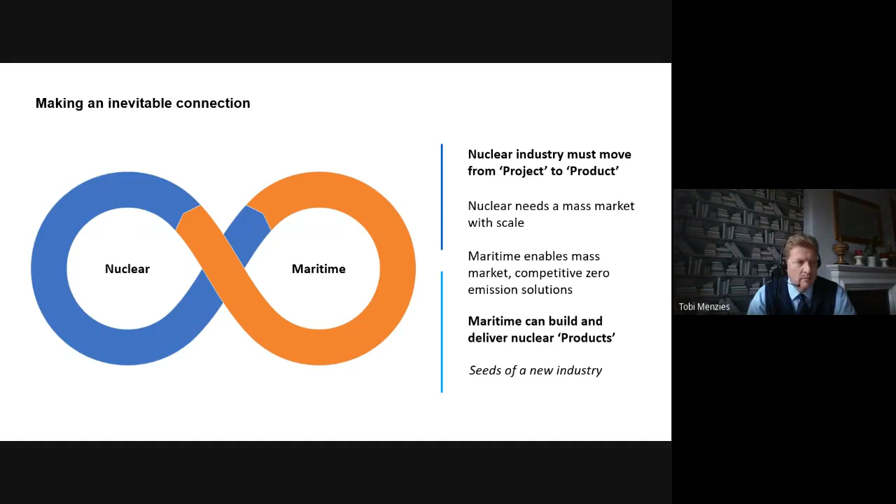Now, knowledge about the nuclear industry currently amongst commercial maritime is limited to fairly small specific pockets. And broadly speaking, there's little knowledge of the maritime sector amongst the wider nuclear industry. So Core Power was formed in 2018 to try and bridge that gap and to create an organization that can pave the way for deployment of advanced reactor technologies, both as offshore installations and on commercial ships.

So more specifically, these are some of the areas that we're involved in. However, I think the most important are arguably the first one and the third one, in the sense that we co-fund and co-develop advanced reactors that can be made appropriate for use at sea. And we're at the forefront of the efforts to update the regulatory landscape so that that technology can be deployed when it's ready.

The other mission statements are, of course, important too, and I'd probably highlight the last one, which is, I guess, our execution risk, if you like: eventually developing a mass manufacturing capability for some of these nuclear technologies is a big piece of our work in front of us.

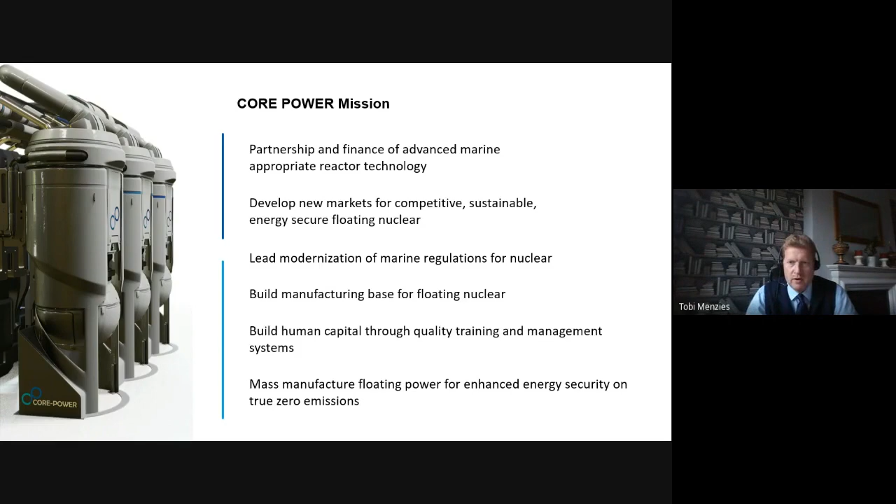But shipping as a global industry has two main challenges in front of it. It has to produce less waste and emissions in part to stop the warming of the planet and to slow that change in our climate caused by the release of waste and exhaust gases into the environment. But it also must remain economically competitive.

Shipping is one of the world's most fiercely competitive markets. It's not a team sport. It serves more than 80% of global trade. So it's really essential that it can continue to do that in an economic manner. And that means maintaining the conditions for a competitive market that both innovates and creates. And it's really the energy use and the energy efficiency that sit at the very center of that.

So the global push for a just energy transition and an environmentally sustainable ocean transportation sector will, at the end of the day, come down to the matters of energy density and energy efficiency. Simply put, the more fuel we use, the more waste we produce, and conversely, the less fuel we use, the less waste we produce. That's why energy content really matters.

So the current low sulfur intermediate fuel oil, IFO 380, contains on average 41 megajoules per kilogram. It equates to just over 11 megawatt hours per ton of fuel consumed. And the industry's focus is on moving to synthetic fuels made from green hydrogen, and they contain less than half the energy of current bunker fuels. So green methanol contains just 20 megajoules per kilogram, and green ammonia slightly less than that.

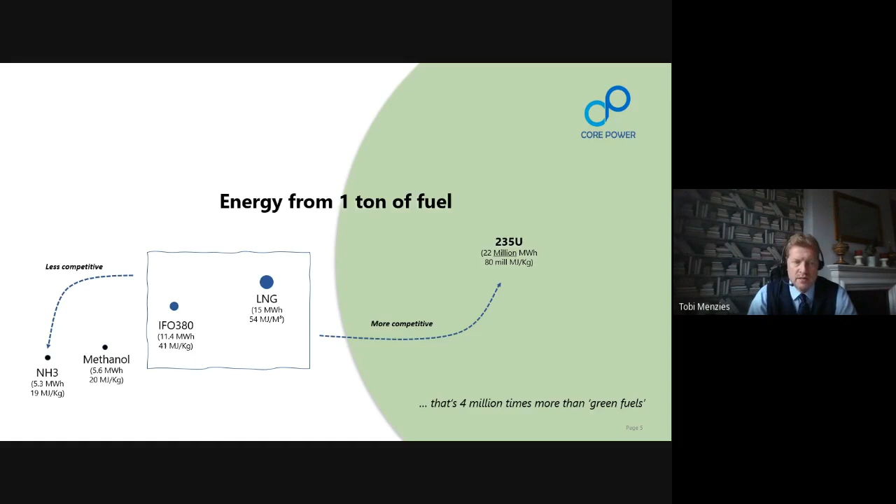So the physics tells us that the quantity of fuel and the fuel efficiency then guide the amount of waste that we produce. So unused carbon in the vessel exhausts from the burning of the bunker fuel mixes with oxygen in the air and creates approximately 3.2 tons of CO2 per ton of bunkers consumed. So that's how the shipping industry contributes 2.5% of the 50 billion tons of global CO2 emissions every year.

Now, using LNG and green methanol would somewhat improve on this. In green ammonia, it's the pilot fuel that's required to start that would actually be the only source of CO2. But with nuclear fuel, since we use so infinitely little of it, we only produce very, very negligible quantities of waste. And that waste, that final product, whilst it is toxic and harmful if ingested, it's obviously never released out into the environment like we do currently with exhaust gases from ships. So if it's not delivered to the environment and it's not ingested, it's logically not harmful.

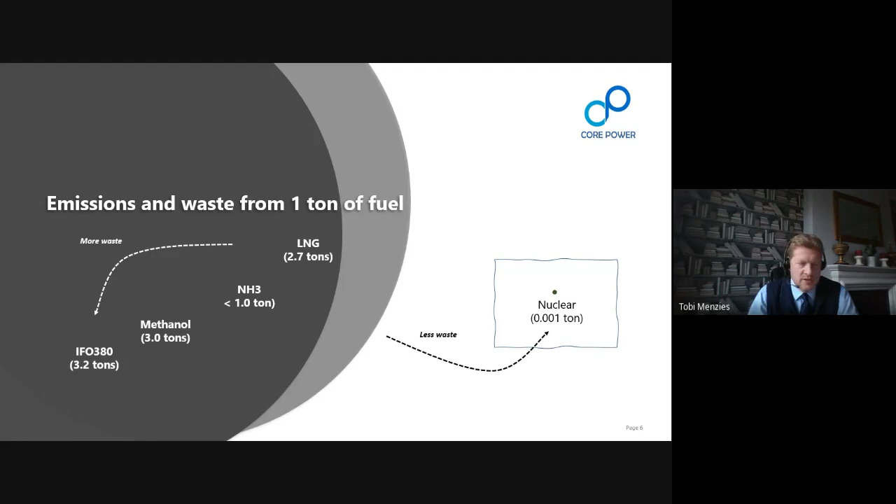So to sort of summarize those last two slides then, shipping is currently in the grey box on the left-hand side. We know that substantial penalties are coming down the track in the form of carbon taxation. We're subjected to large swings in the price of fossil fuels, and we have to travel at economic speeds to save fuel rather than at the optimal design service speeds.

The middle section in blue is one option for shipping, where it provides some compliance with the environmental rules and regulations. But in order to do that, the ships will have to reduce their cargo volumes to make way for the larger fuel tanks, which will be filled with these less energy dense, low carbon fuels. And they'll have to sail even slower, and they'll still have to connect to the shore power when they're at the berth.

The right-hand column in green is the disruptive option. This is what's possible with new nuclear on board. The vessels can carry more cargo. So the large fuel tanks that were there can now be converted to cargo space. They can sail faster, even exceeding in some cases the old design service speeds. And they can actually provide power to the ports that they call at when they're at the berth. And they can do all this with true zero emissions.

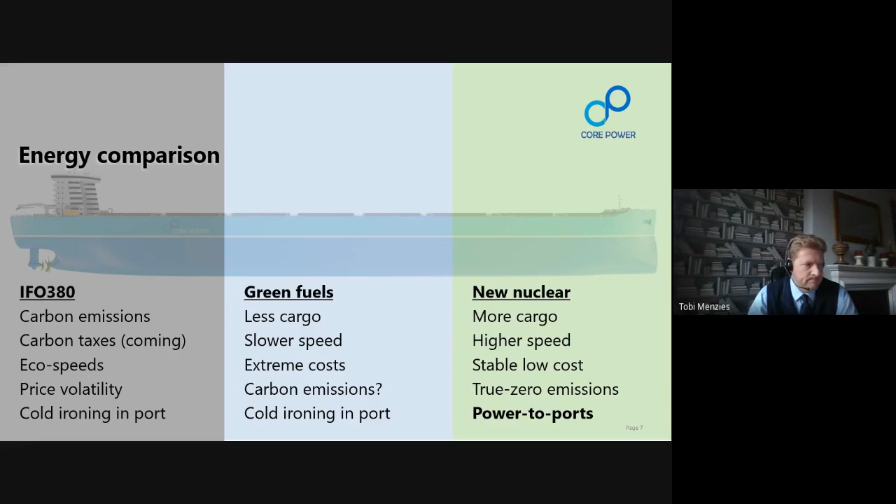It sounds great, but nuclear is not necessarily easy. Substantial challenges lie ahead, in terms of technology, integration, regulation and financing, and of course public liability. But work by ourselves at Core Power and some third-party expert groups has done some research into nuclear technologies that could function for the shipping industry, and really concluded that there are three key criteria that must be met for this generation of reactor technology to be really accepted in the marine markets.

The first criteria is to have exceptional fuel efficiency of new nuclear, which could in fact provide a fuel cycle that lasts an entire lifetime of a ship. This would then remove the need to refuel reactors and remove the need for handling of fresh nuclear fuel and spent nuclear fuel in ports around the world.

The second criteria is the new nuclear for marine must become affordable, mass-produced, mass-assembled products. And to achieve this, we'd need to see quality manufacturing of modular designs and modular construction of these integrated reactor and power conversion systems.

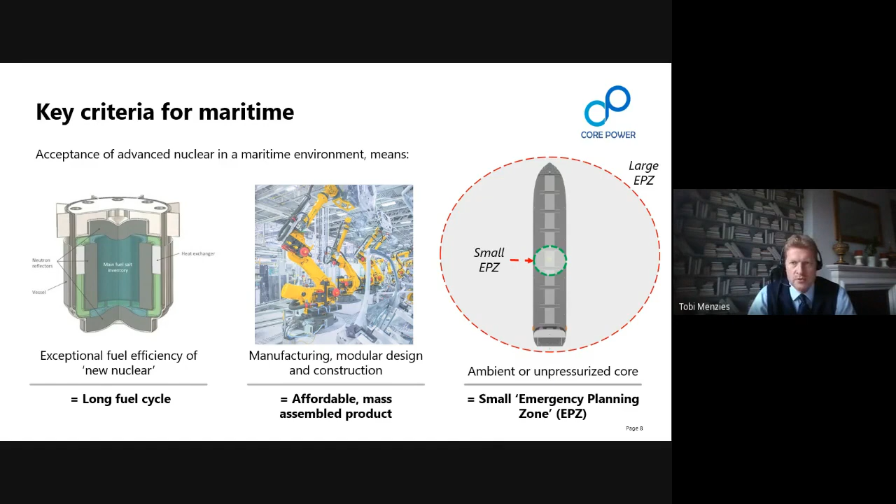And finally, for nuclear electric powered ships to call into ports and to transit canals and waterways, we'd need to see the emergency planning zone, or the EPZ, which is required around all reactors, whether on land or at sea, shrink down to be within the boundary of the ship, something Truls picked up on there in his piece.

Now, to achieve that, the reactors must be small and unpressurized. And with ambient or no pressure in the reactors, no radioactivity could then physically be dispersed outside into the environment in case of a leak or in the very unlikely case of a malfunction.

So this EPZ, this emergency planning zone, really matters, and it's probably the primary reason why nuclear as we know it today has not been widely adopted by the shipping industry. It's essentially the difference between unlimited liability of maintaining a large EPZ versus the limited liability of maintaining a small EPZ contained within the boundaries of the ship.

And the examples that you see here are illustrative of this point, really. With a large EPZ, the red dashed line, the operator of the vessel would be responsible for evacuation and cleanup of the area in a port, or in some cases, a whole port city in case of an accident or an incident. But with a small contained EPZ, the green dashed circle, that liability wouldn't extend beyond the railings of the ship, and it could be covered then by marine insurance. And that's a very big difference.

In the case of waterways, as you see on the right-hand side, where the EPZ, the planning zone, is moving along with the vessel, a large EPZ is an almost inconceivable liability burden for even the biggest vessel operators in the world. But again, a small EPZ not extending beyond the hull boundary changes all of that in one go.

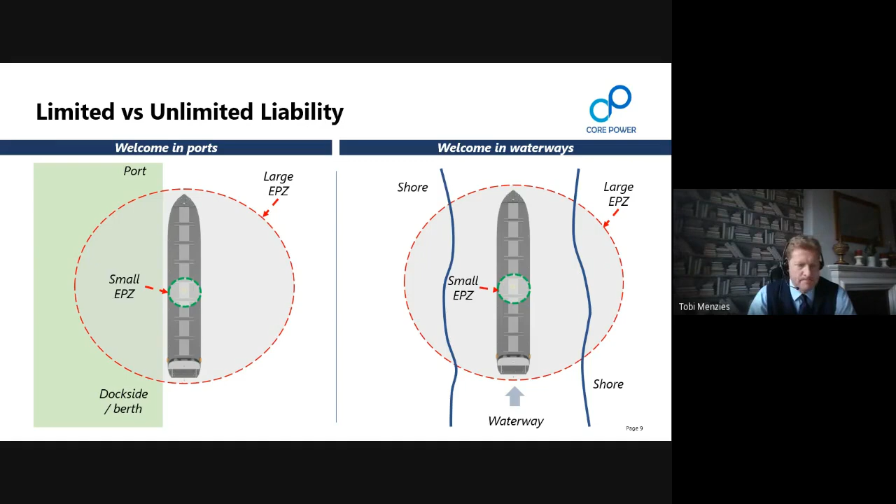Now, marine accidents do happen. We can't assume that a nuclear vessel will be somehow immune. However, the reason that we're working with the advanced reactor types that we've chosen is precisely because they perform so well in adverse scenarios. They have passive safety systems fitted that will shut down automatically in the event of an accident, even if no one is left on board to do so actively. And these fail-safes can place the reactor into a hold-down mode from which the power can be restored relatively easily if the situation is quickly resolved, or they could actually shut the reactor completely.

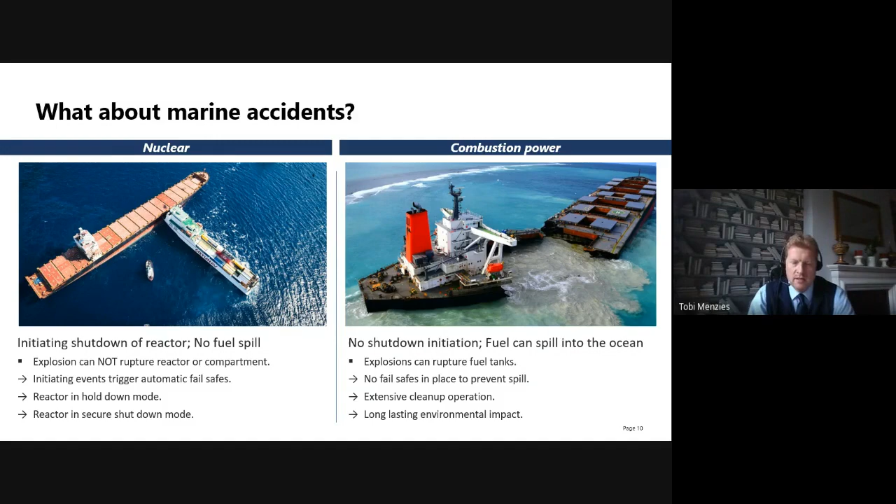If a vessel containing a molten salt reactor were to sink, having shut down, the fuel salts would eventually cool and they would solidify inside the reactor itself to this rock-like substance. And the reactor would be completely sealed inside its compartment. There would be no chance of the contents leaking out into the environment.

But with fossil fuels, however, the consequences are actually much more severe. And with a new generation of low-carbon synthetic fuels that are derived from hydrogen, there actually comes with it a different set of risk profiles. The toxicity of ammonia, for example, is already proving to be something of a challenge for parts of the shipping industry to actually prepare for.

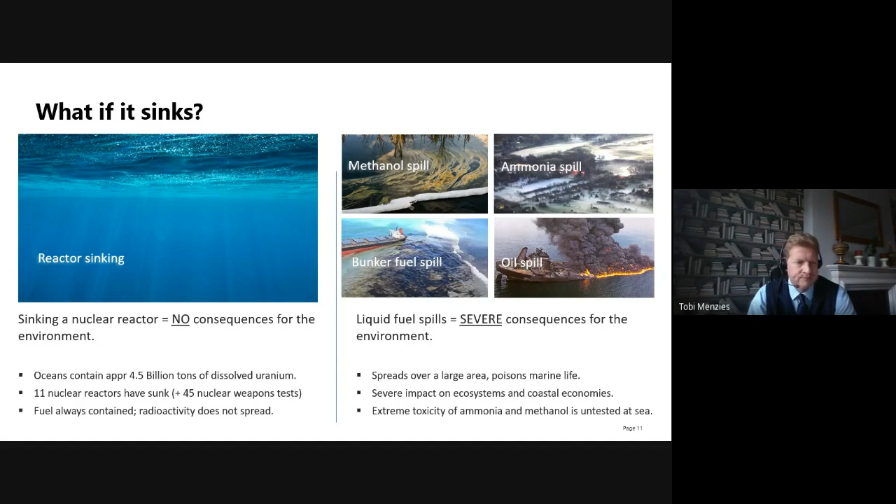Nuclear security. 2 minutes, Tobi. Yeah. Sure. Yeah, I'll rattle through this.

Nuclear security is also a very relevant point. Nuclear ships may be perceived as targets, but there'd be an extremely robust set of deterrents and safeguards in place to mitigate that. We're talking several levels of defense in depth conceived from the design stage onwards. As I mentioned, that reactor is completely sealed inside an inaccessible shock-proof compartment.

It has an impenetrable ring of steel and concrete around it. It'd be quite impossible for a bad actor to gain access. And I think even if he could, removing a parcel of molten salt fuel to use for whatever purpose would be several orders of magnitude more challenging than envisaged. But I'm going to move on from there in the interest of time.

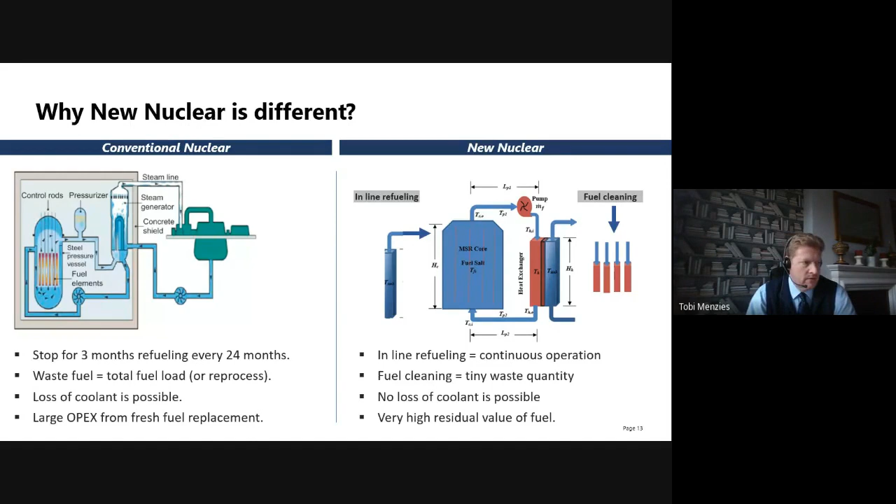We would like to have a little bit of time for questions, Tobi. Is it possible to wrap it up there? This is my last slide.

Just a quick thing on the development timeline. It's shown here. Importantly, this is one of only a few reactors actually being built. We're approaching the full testing of the prototype with fissile materials in '25. The integrated effects tests are underway already and going well. And we will then look to have a full-size demonstration machine between '25 and '28. And the project order book could open from around 2030.

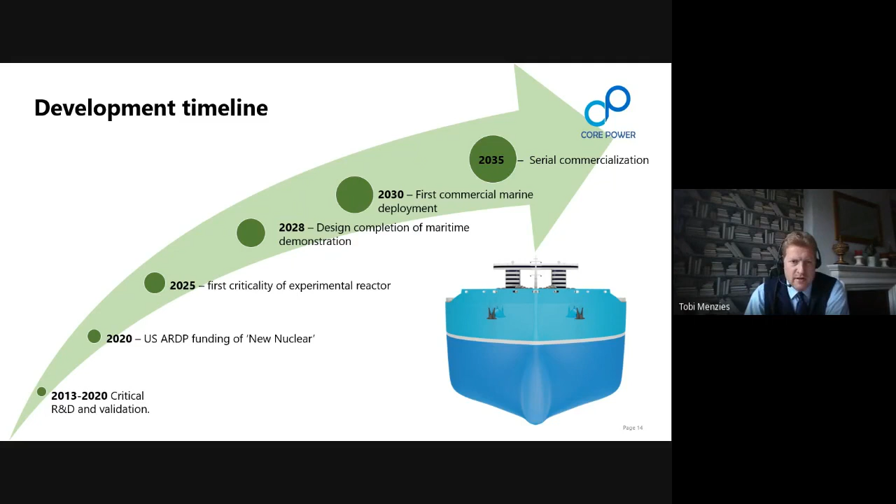Okay, well, I have a question. Go ahead. How do you deal with the corrosion in the metal system? Coating or something like that? Yeah, corrosion was a problem for some of the very early molten salt reactor experiments that were run in the 50s and 60s. But I think even in that case, a lot of the challenges were resolved over time, although funding was slowly pulled, and the PWR took over as the predominant nuclear technology that then evolved into providing grid scale power mostly around the world.

With the advancement of modern materials and supercomputing, a lot of those corrosion problems have now been solved, and there's a very high confidence amongst our partners in TerraPower in Seattle that those problems have been solved. A lot of it relates to the purity of the chloride salts and enriching the salts to the right level of purity, so that the corrosion is mitigated. But they've done many hours of testing now, and I believe those challenges are not so much of an issue.